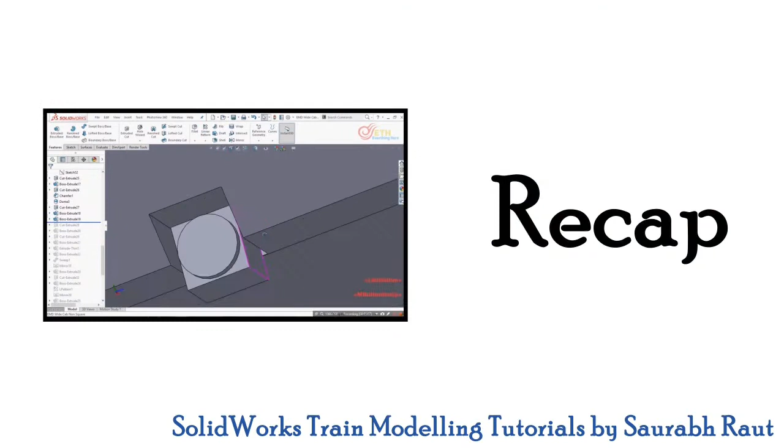In the last episode, we completed our cabin body and the parts required to do the assembly of the cabin. Going ahead, we can't proceed with their assembly before coloring them using the split lines. So now, we will start with other parts required to assemble in the main body.

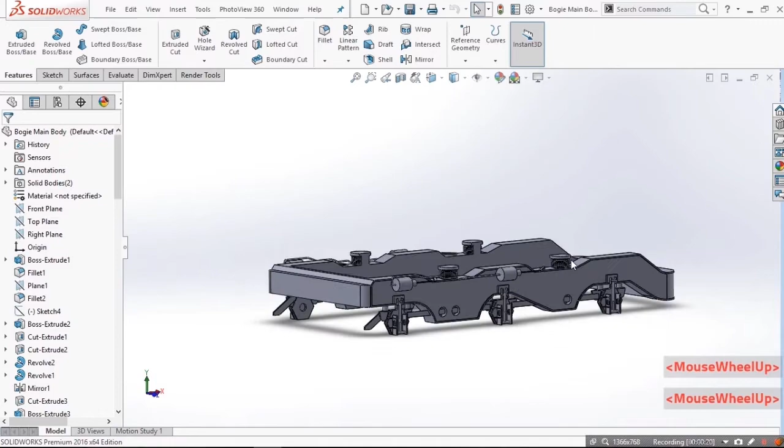In this video, we will make and assemble the whole set of wheel arrangement. It contains the main body of the bogie and only the wheels. This is how the body of the bogie will look when finished.

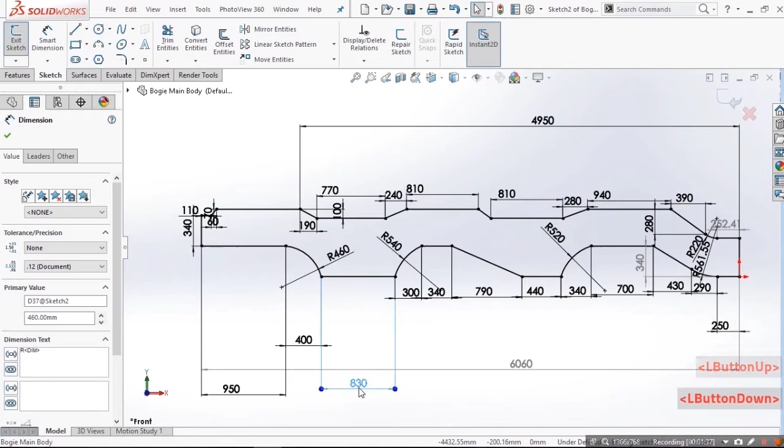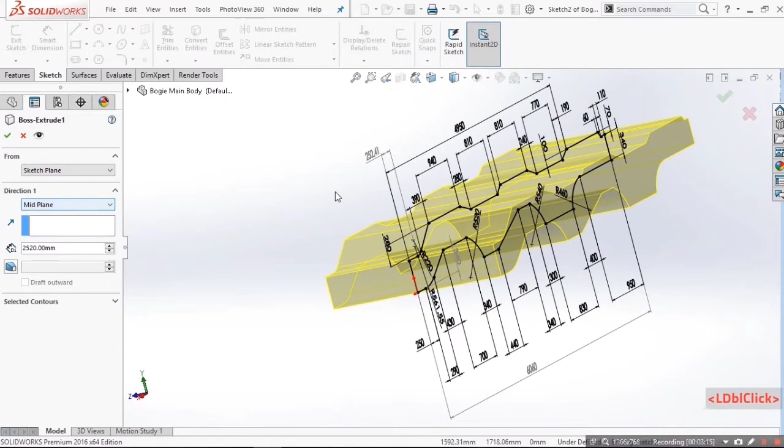To begin with, we have to make a base feature as usual. A quick look at the dimensions of various sections that I gave to the base block. A mid-plane extrude by approximate dimensions, filleting around the corners.

The diameter will be 250 mm here. I made two separate features since we will be having two different diameters. Here I am giving it as 110 mm.

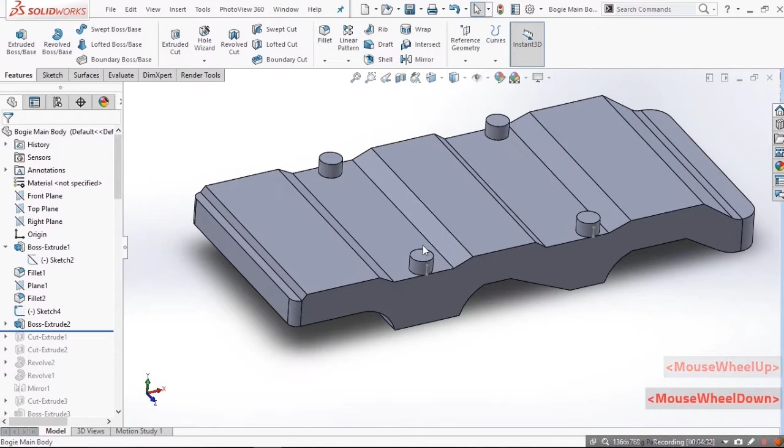Now these 4 extrudes will be used to fix the body with the main body of our locomotive. So it should be taken equally on the main body also. The equal dimension holes should be made on the loco body to fix this bogie body there.

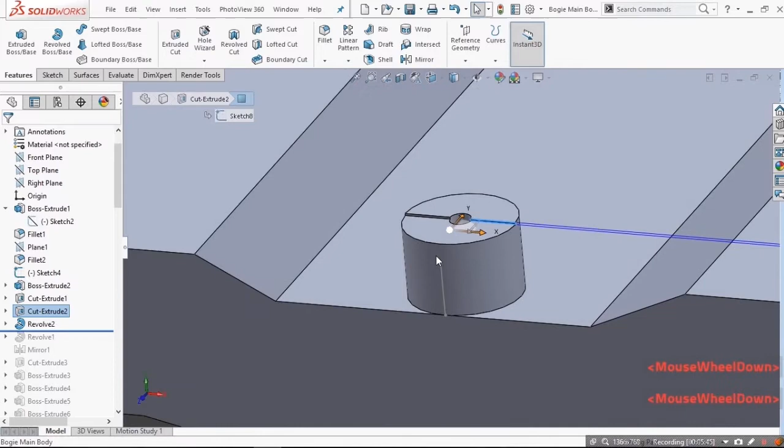Now making a surface for a sketch to be drawn, which will be used to revolve. Using the surface there, I first made the revolve on this side so that the surface doesn't hide inside the revolve. That's the sketch for revolve. The central line will be the axis of revolution.

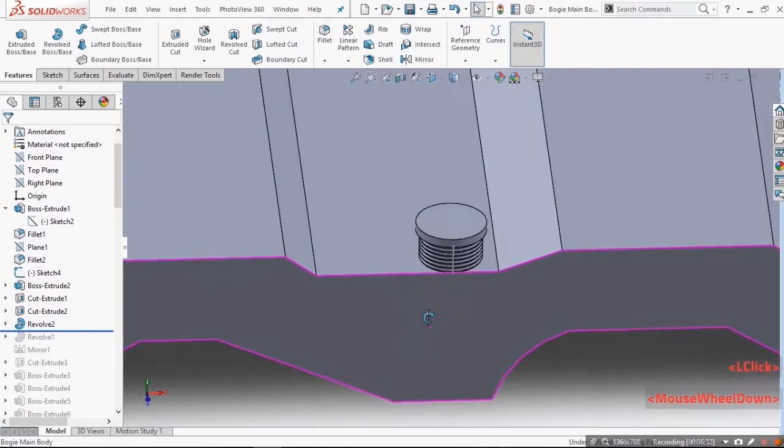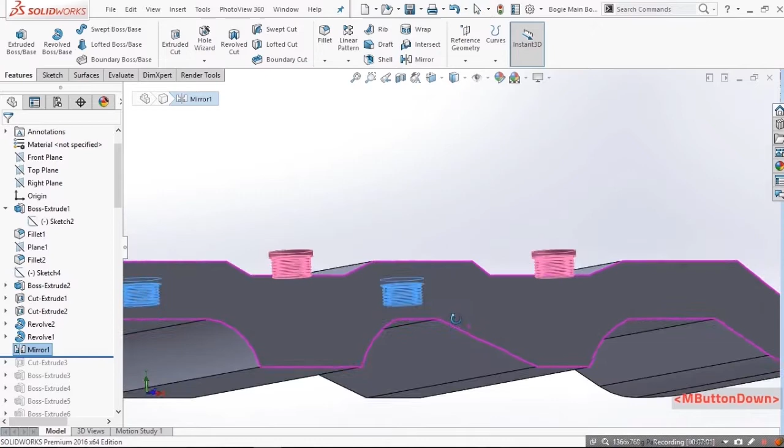Now doing the same on the circle with cut surface. Mirror both the revolves on the other side. So now we have removed the central part, which has also taken some part of our recently made feature, but that's fine. It would be on the inner side, so that doesn't matter.

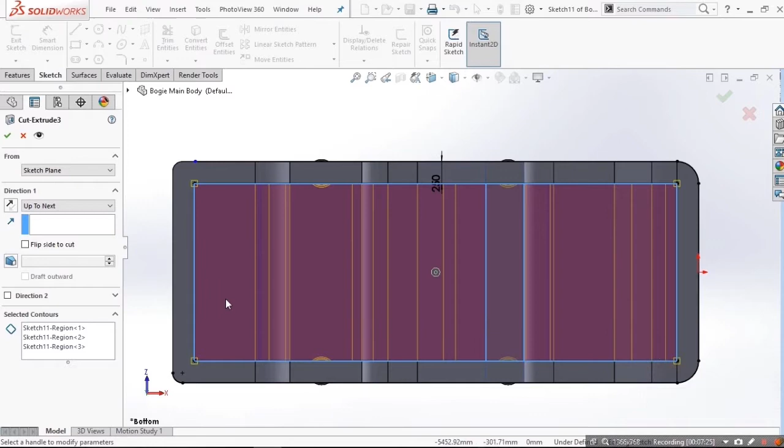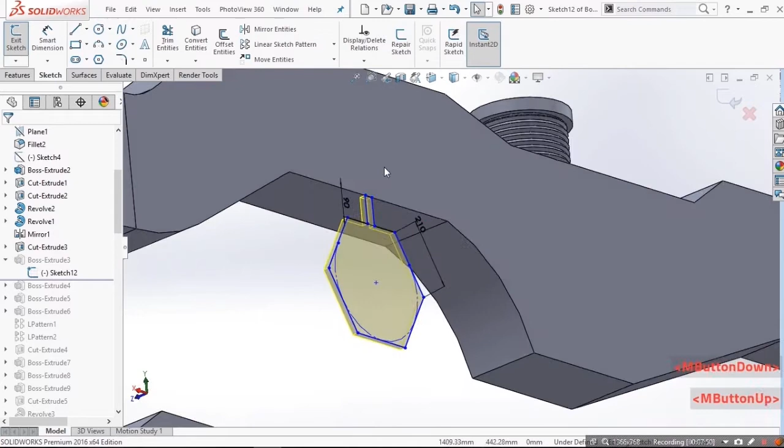Moving ahead, I have made 3 hexagons here. No need to make all 3 separately, just make one and copy the rest. Let me show you how to do that. Select the hexagon from the sketching menu and draw the hexagon and give it some dimensions.

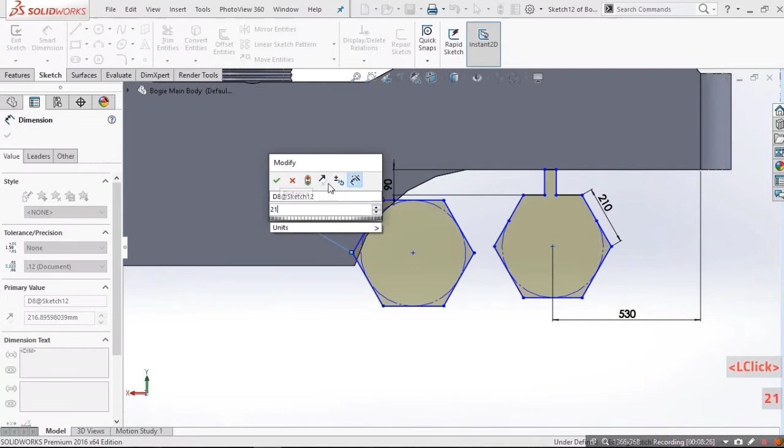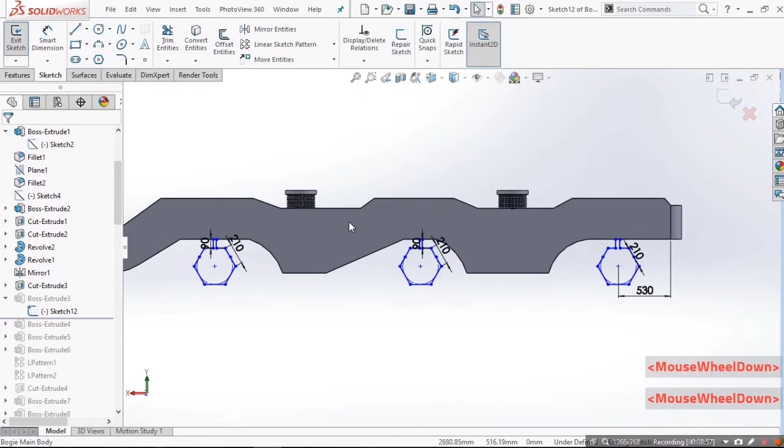Now to copy your sketch, select all the lines or entities and in the Move Entities drop-down menu, select Copy Entities. Mention the start point and start copying as many times as you want. Just a few detailing features.

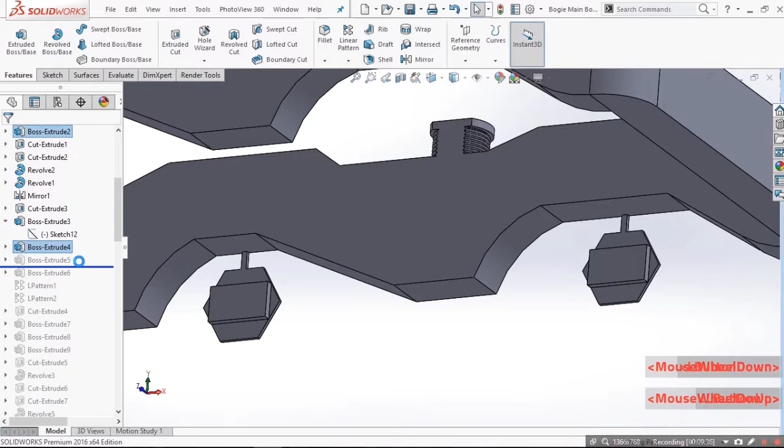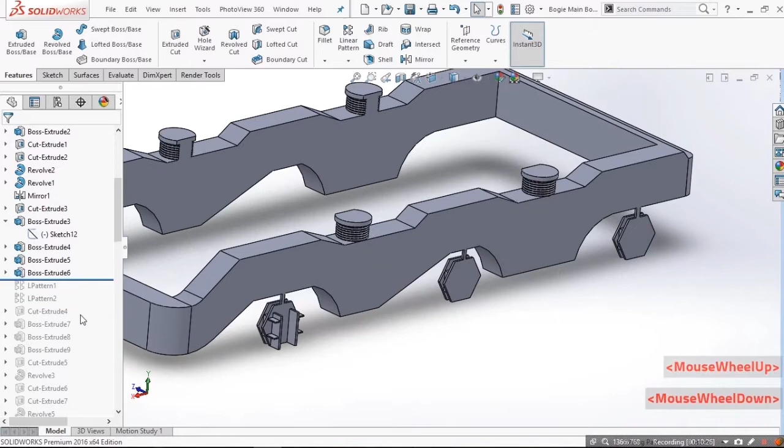That's not a very significant feature from the appearance point of view, but it will fit the wheels inside it. This will work as the base for shock absorbers. For the other two spaces, the distance is not equal to linear pattern it in just one turn. So we will do linear pattern twice.

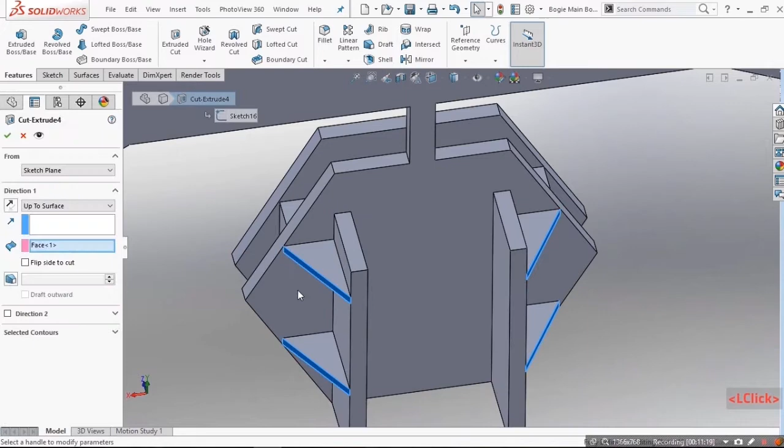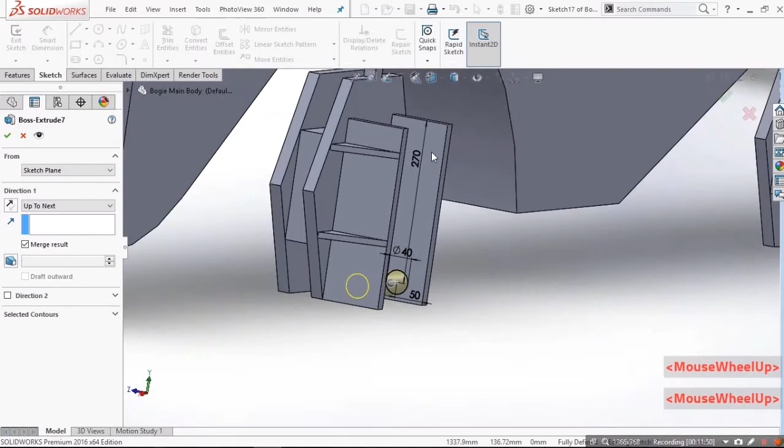See here, you can observe that the distance is not exactly the same. This I did for all three by drawing sketches on all three bodies. It is a cut extrude. Lower base of shock absorber. Now making the upper base, we will pattern it all along together.

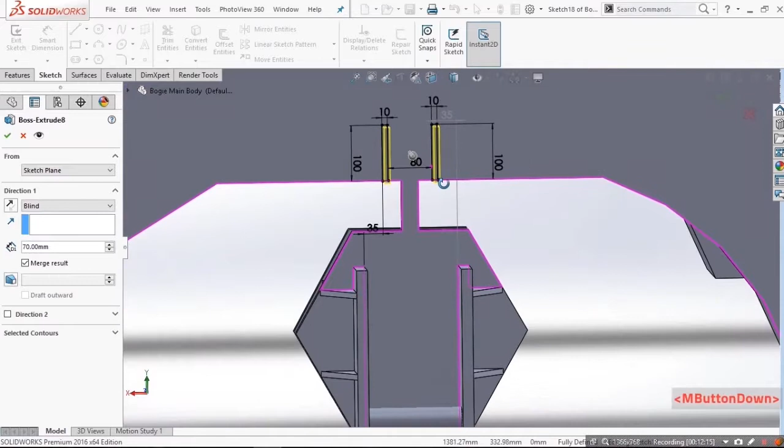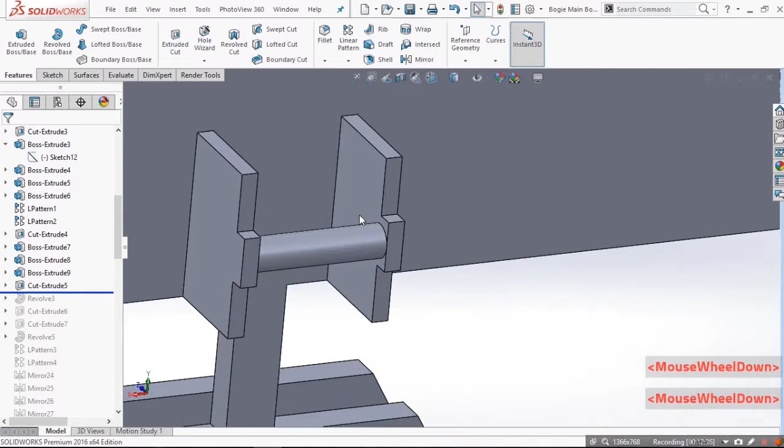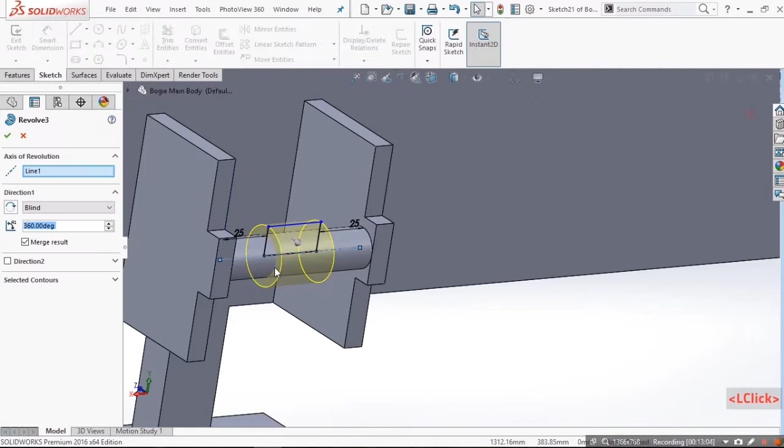The upper end side. This will be a circle smaller than the lower one. This cut should go up to half of that circle. I'll show you why. Because we want to make this revolve. The sketch surface will be that surface which we just cut.

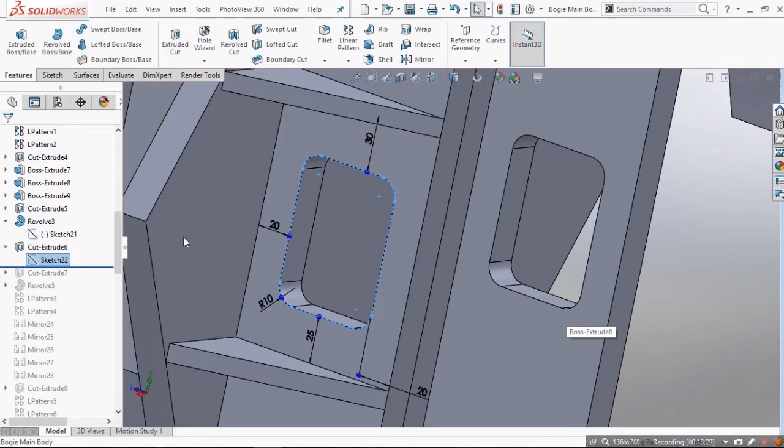Performing this cut prior to making the shock absorber model, since we need it as an end-to-end cut and we can't cut after making the shock absorber. So that's what I was saying, we want it end-to-end. Now I am making a straight surface to use as a plane to draw a sketch for revolve. Up to half here.

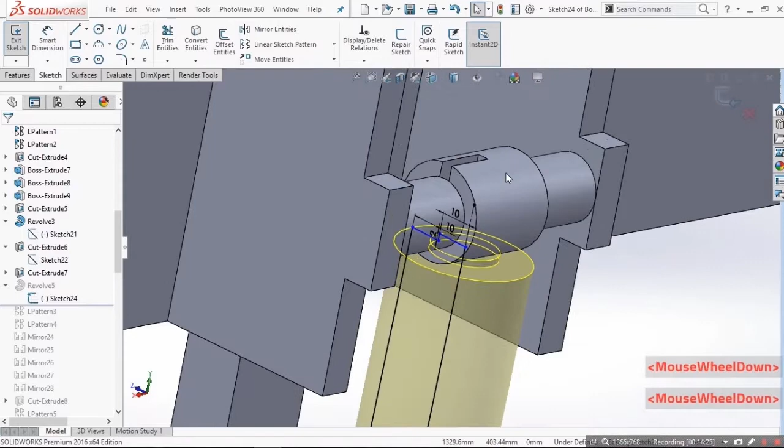Now that's the visual model of the shock absorber. A little inclined so as to match both the upper and lower ends. The center line will be the axis of rotation.

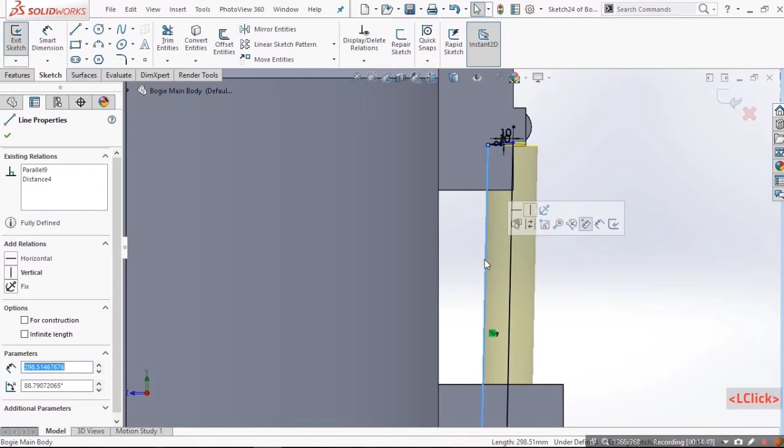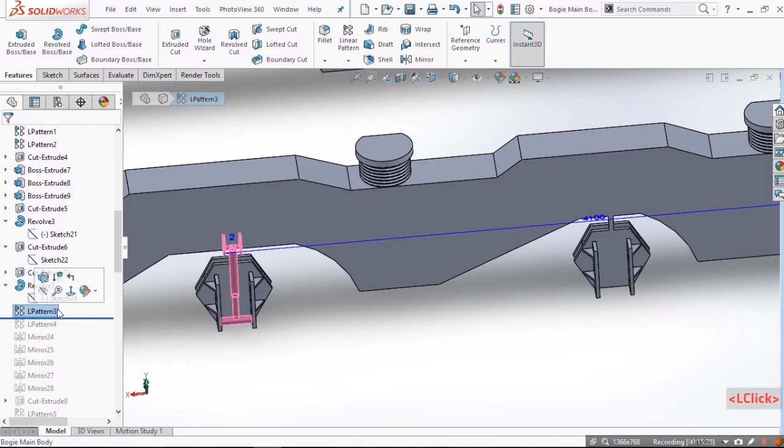Now, as previously, we will pattern all these in 2 steps. I am mirroring all these on the other side, step by step, not all at once.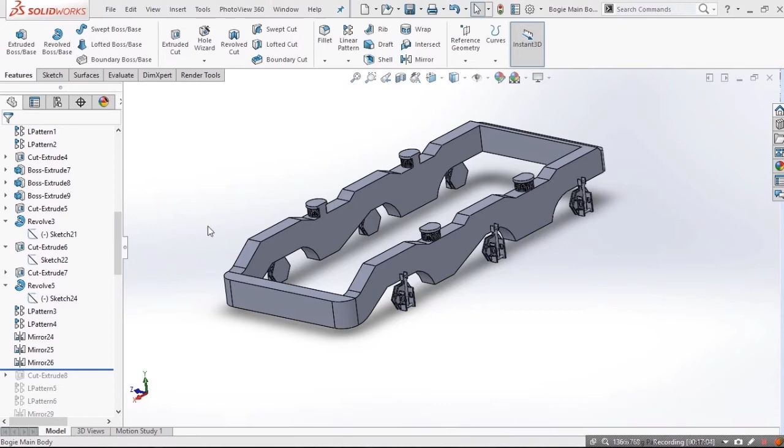Now, this shall be the groove where the wheel will be assembled. The diameter should be equal to that of the wheel axle. Again, pattern and then mirror.

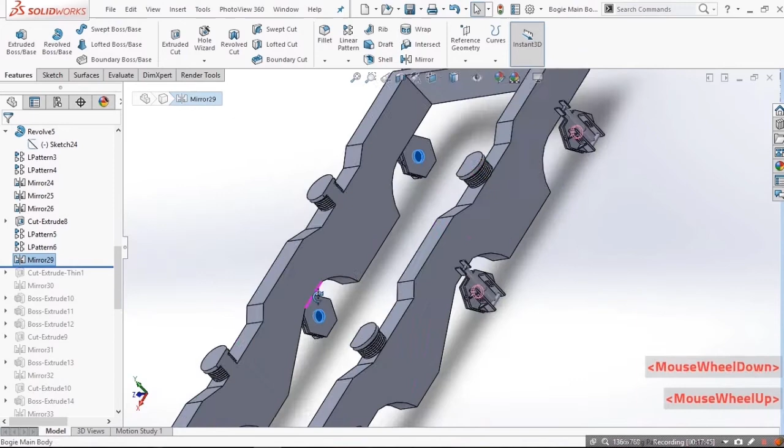This I am making now is the outer body of our bogie body. This will improve the looks. To make that, I just converted and offset the outer boundary of the surface. Just like this.

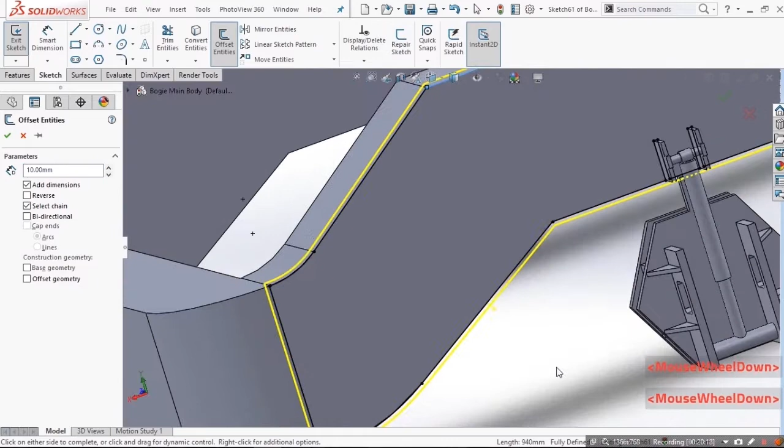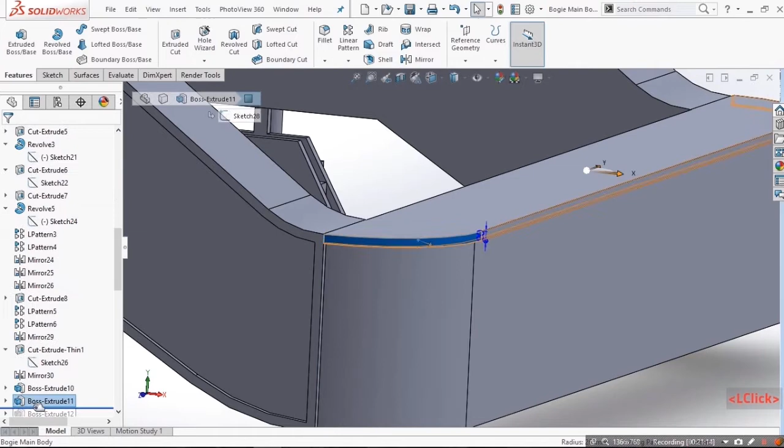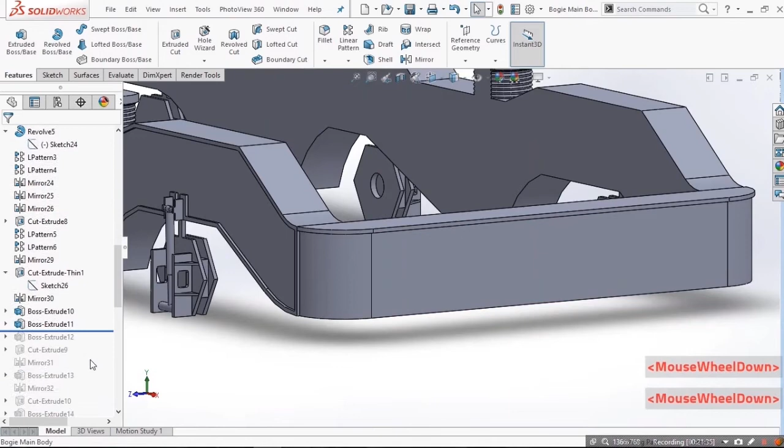For the remaining surface, we can't use that technique to convert and offset. So we have to extrude some part from the above as well as some part from the below. That's how the sketch should be made. And then remove the extra part.

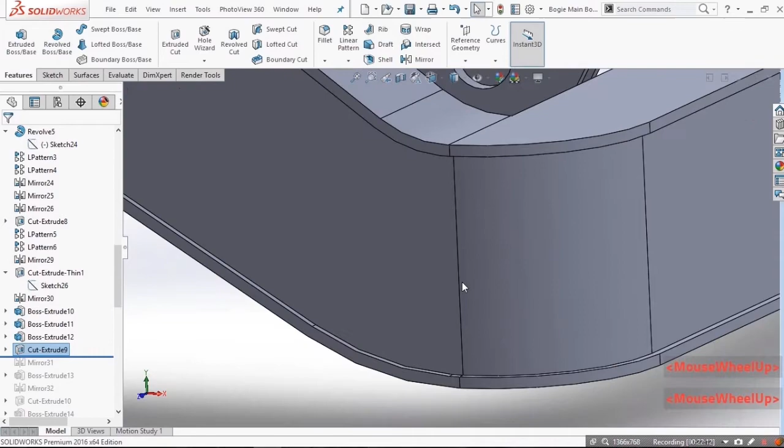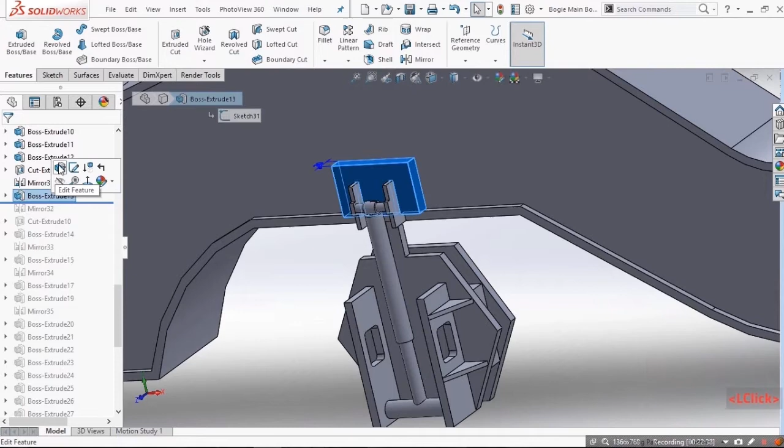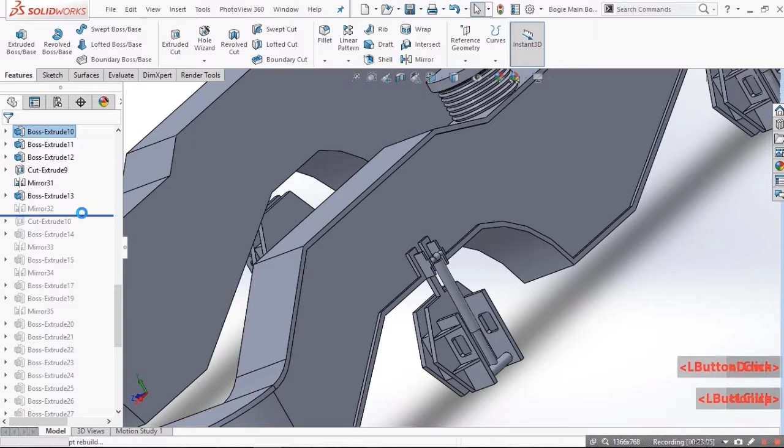This I had forgotten to add earlier, so adding it now. Mirror on the other side. Adding the next features.

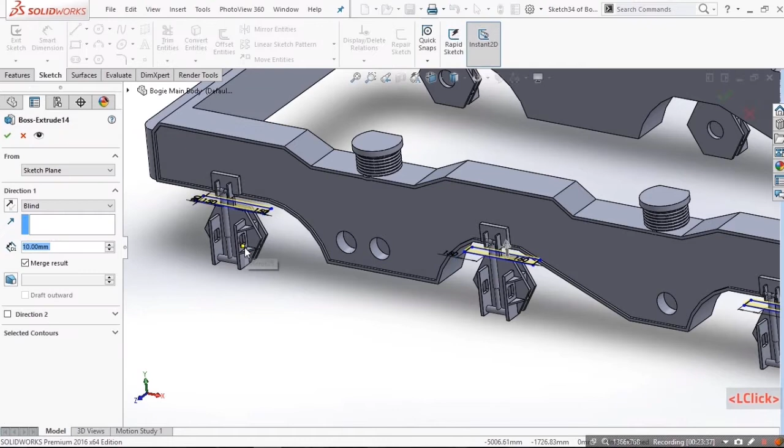Every time I don't need to explain what I am doing here, since we are using only basic features and commands in the model.

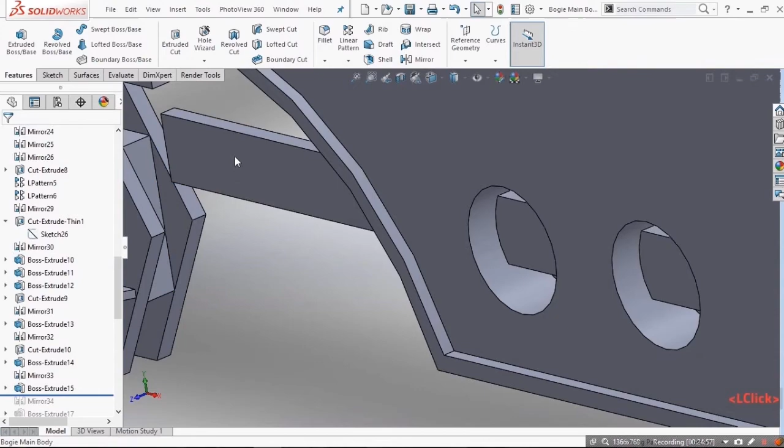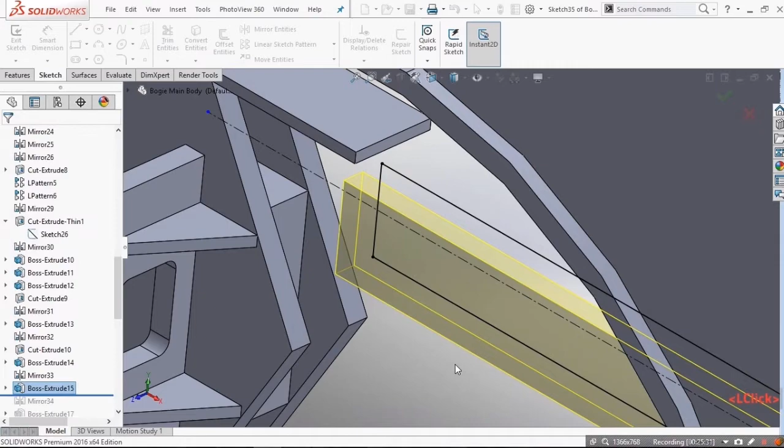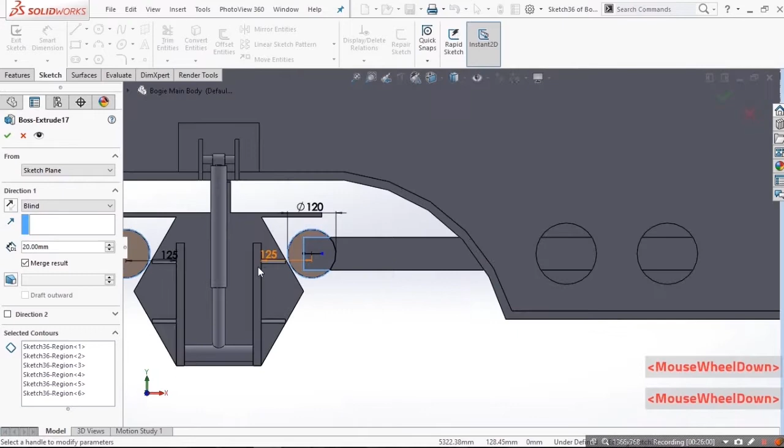The feature is offset from the sketch surface. I use the offset command here. The separate bodies always need to be joined to the main body.

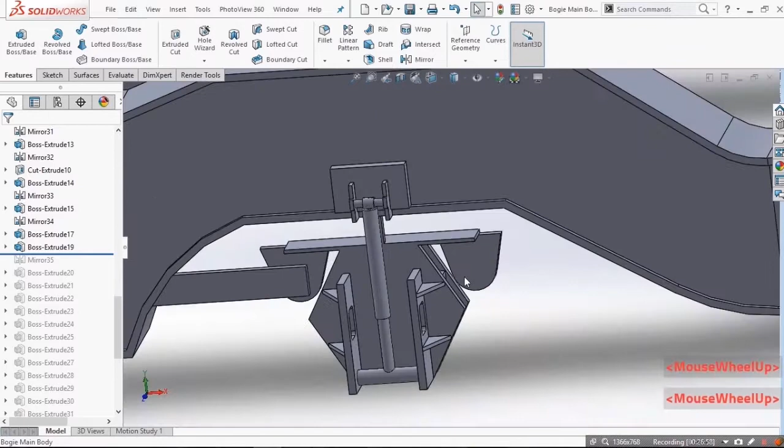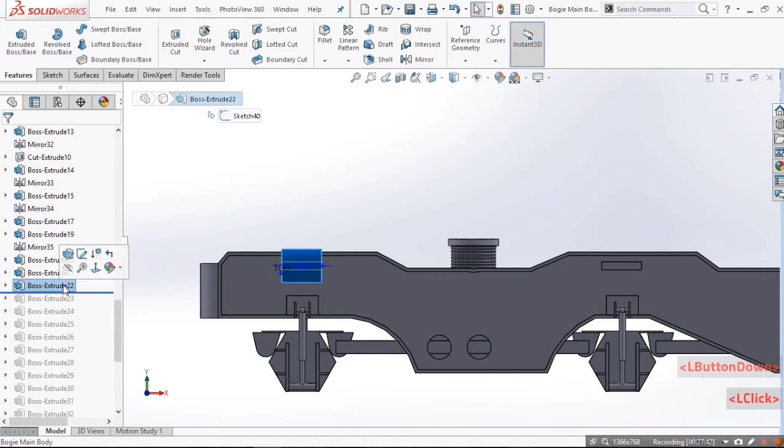To make the next few features, I need an extruded area. Here I selected the draft option and gave the draft angle as 55 degrees.

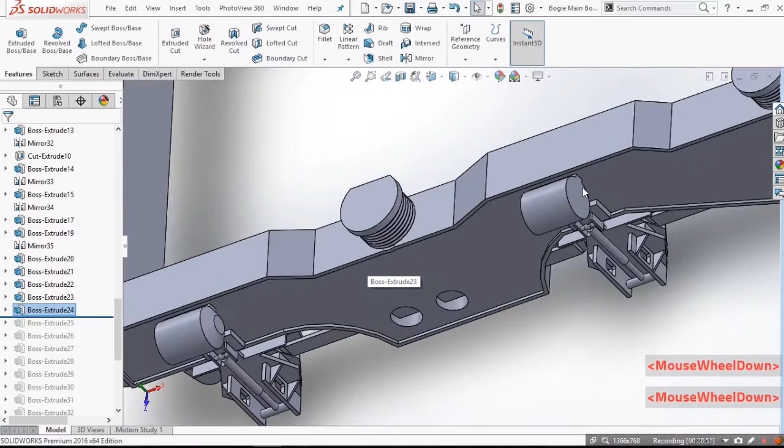Again a drafted extrude. Repeat all those things on the right side feature as well.

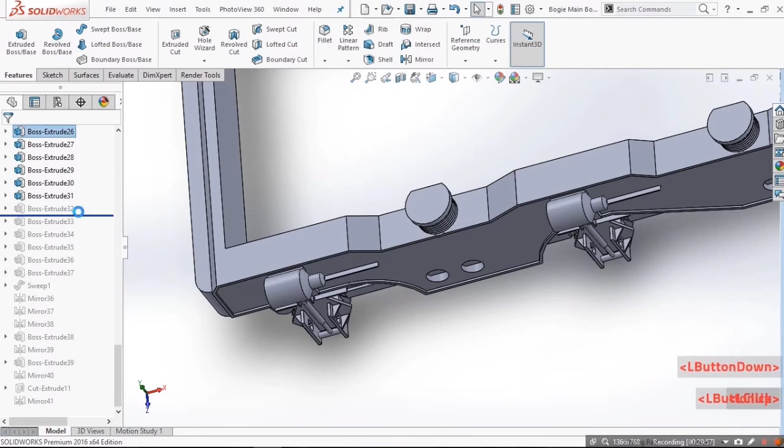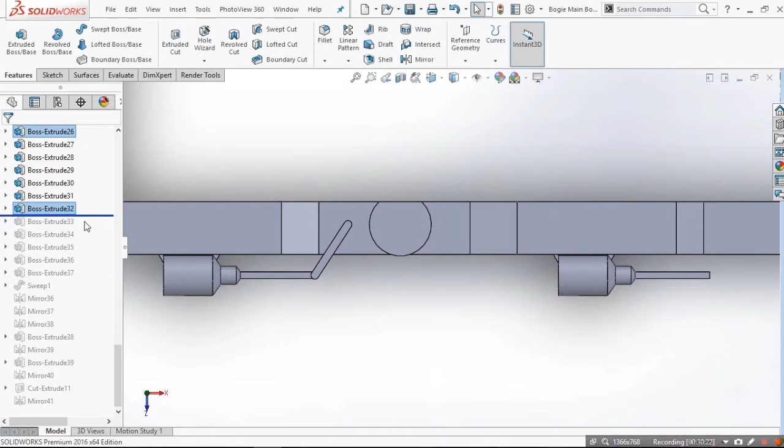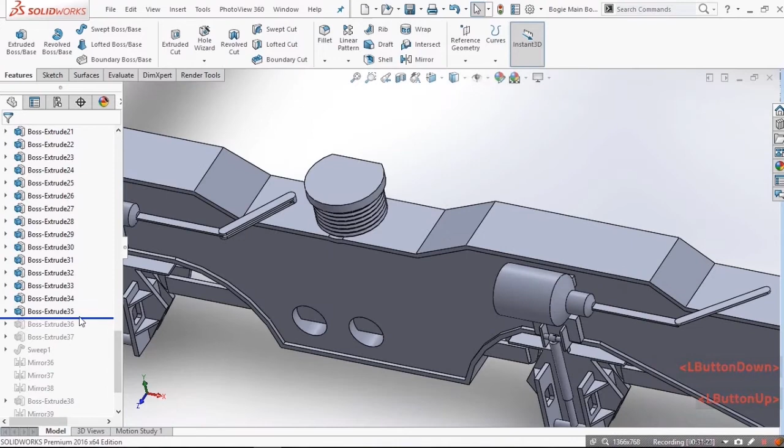An inclined slot of approximate length. I also made a similar one on the downside, just like a sandwich. On the right side part also.

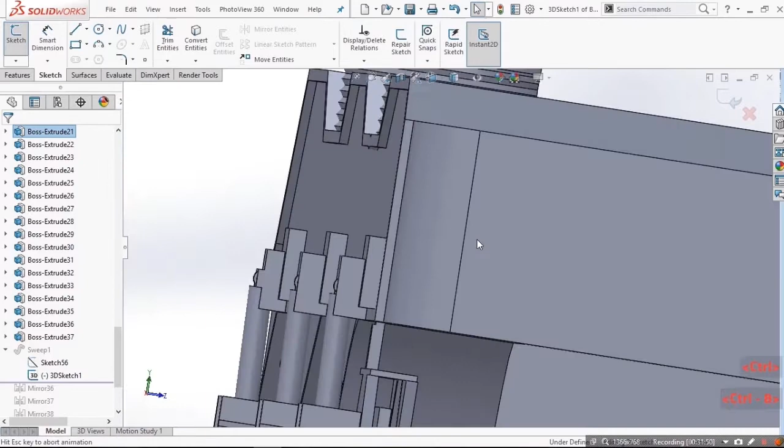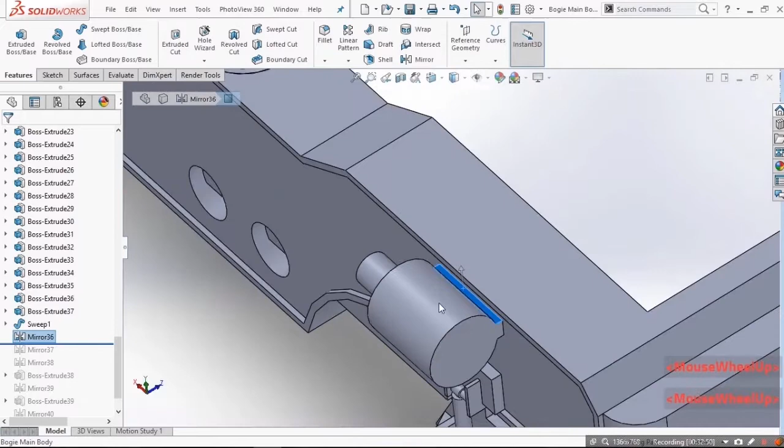Now this is a simple sweep made out of a simple path. It just looks complex, but it is not. Mirror everything on the other side, step by step. Just a few final details.

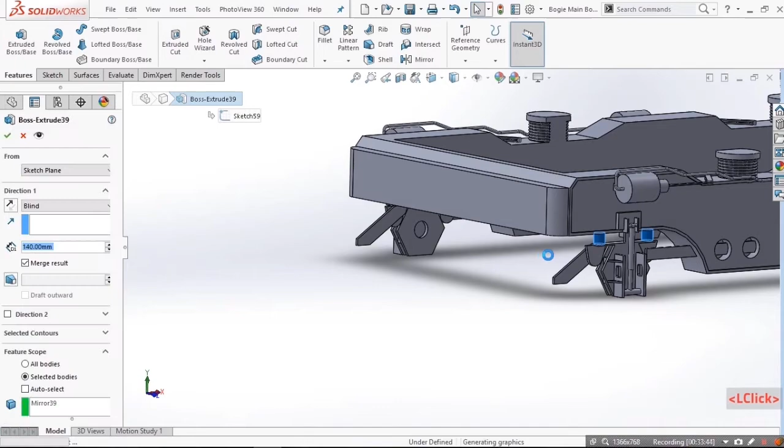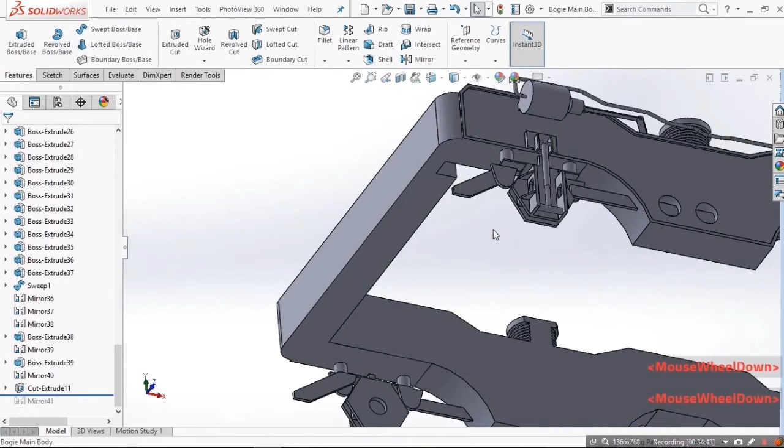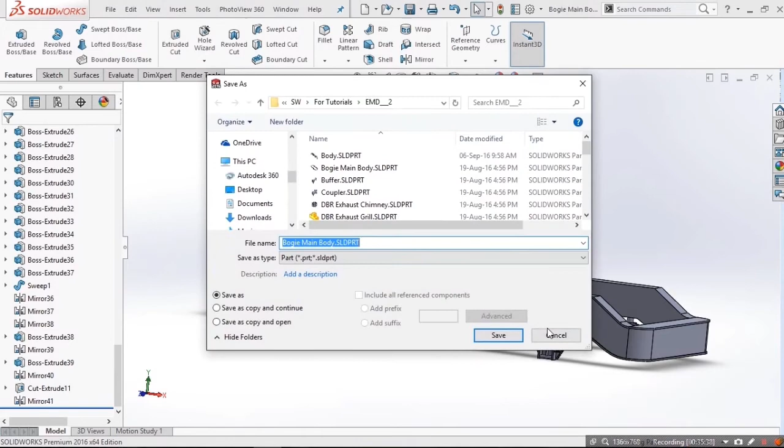Now, this cut will allow the wheel to move without interfering with the bogie body, and it should be on both sides. It depends fully on the diameter of the wheel. I removed the part after I found it interfering in the assembly. Now save this part as Bogie Main Body and we will go make the wheel.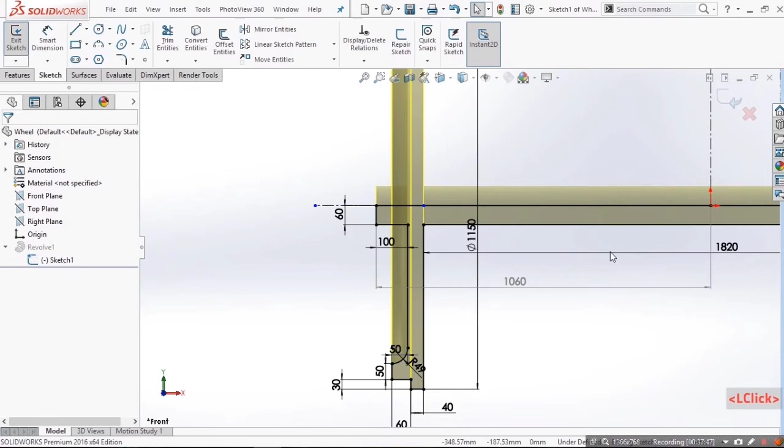So save the wheel and open a new document for assembly. So first, we need to insert the bogie body. Now insert the wheel once. Select the wheel, hold Ctrl and drag out to get another wheel. Once again.

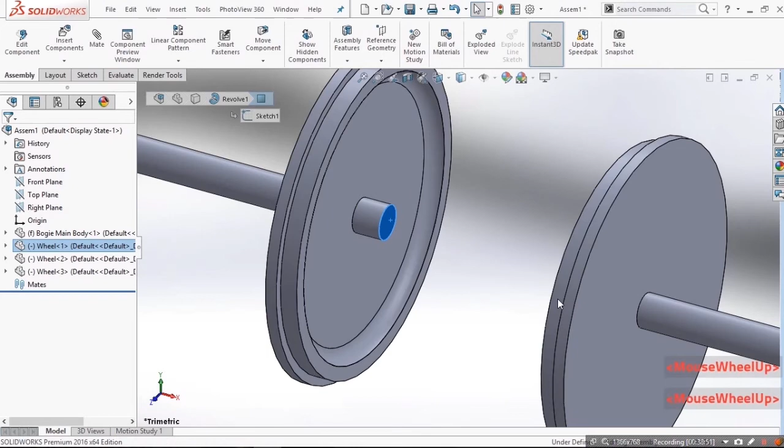Now first, mate the sides of the wheels mutually because they will remain in line. Oh, it just overlapped, no worries. Now mate the circular axle with the groove we made inside the body. Similarly for the remaining wheels.

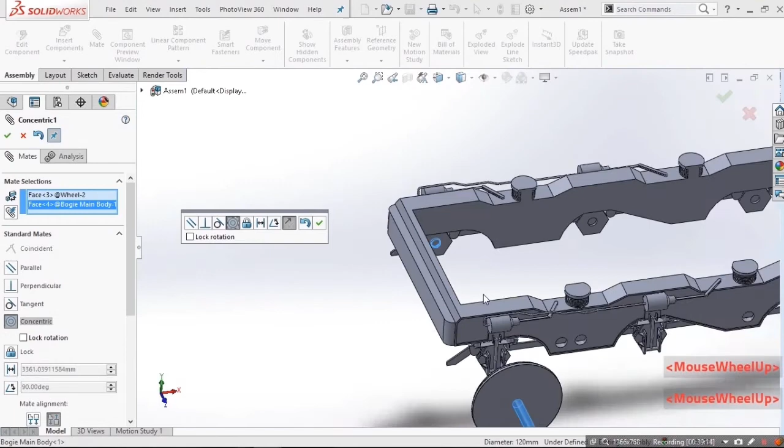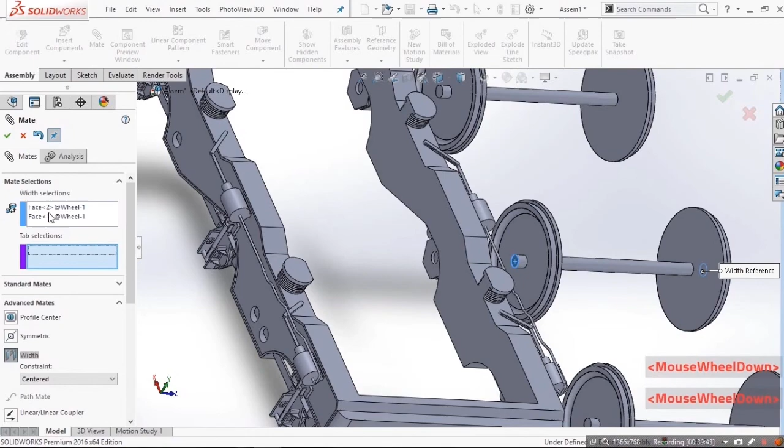Now for aligning centrally, we will go into advanced mate and select the width mate. Select any of the symmetric widths on the wheel, and similarly for the tab, select any of the symmetric widths on the body. That's our wheel assembly completed.

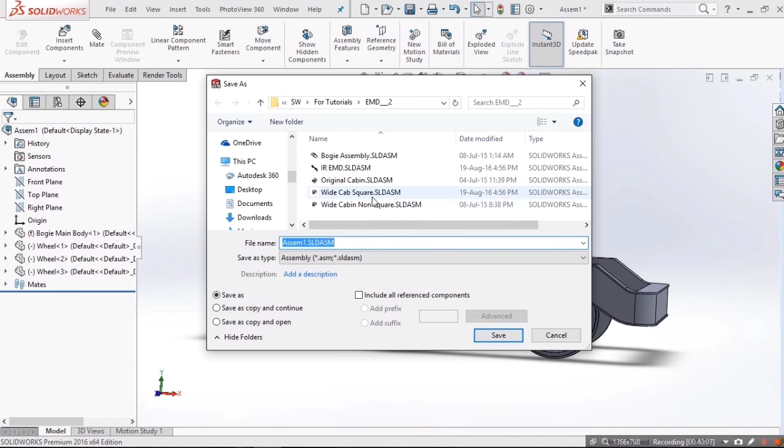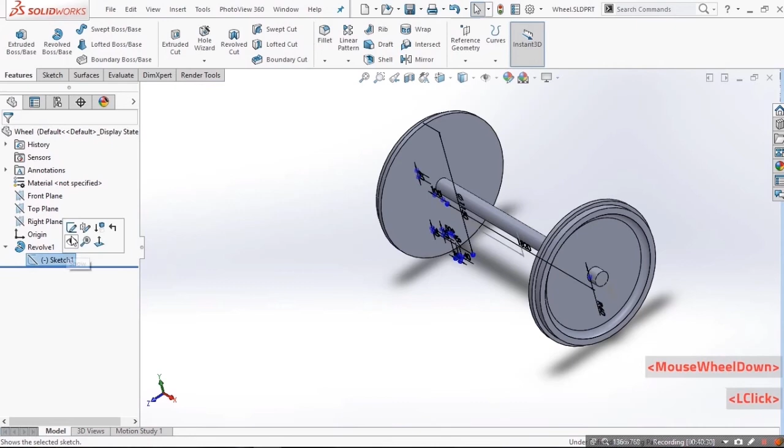If you find some error after finishing, just open that part and edit the required dimension. That's pretty fine.